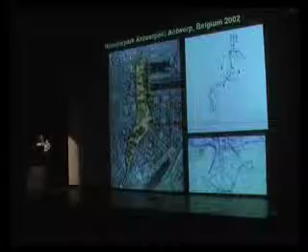Now, I'm diverting for a second because a long time ago, we did do a competition with Willem Neutelings. I think this was in 2002. It's for Antwerp, the abandoned Belgian railway yards.

I don't really remember all the names of the neighborhoods. I couldn't really actually pronounce them when I was working on it. So I can't really remember the specifics about it, but I do remember that we didn't win it, and it broke my heart, and I thought that the jury screwed up. They should have picked us, but I'm biased.

But we did try to do a number of things. It was an extremely interesting piece of land, and these are kind of typical things that come across our desk as landscape architects, which are these kind of random, strange pieces of land that are going to be reborn into another use. And it has a very, very strange shape. It's surrounded by a great variety of different neighborhoods.

This glitch is really not good. Wow. Okay, are you sure you can't understand English? Yes, okay. Try not to look at it.

The core of the landscape, of the design, was to try to bring meaning, or a new meaning, into this big site, so that it could be actually reused by the city. It's about 24 hectares, and it was interesting because there were so many disparate pieces to it.

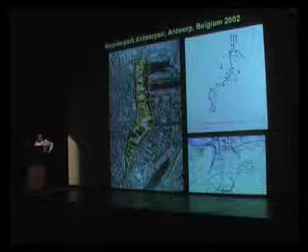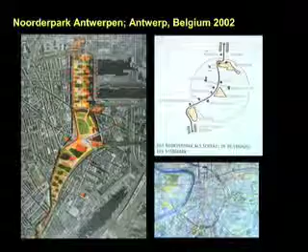We basically came to the conclusion that the west area, the top area, would be a much more cultivated, park-like space that could be integrated with the mixed use, the office, the residential area up against the dock area, the port. The middle area, the belly of it, was a great big public civic open space that the whole city was invited to. The east area was really a great big playground where we envisioned having all sorts of sports.

I don't know whether Will is in the audience. He probably should explain this better than I, but we had some very simple diagrams. One of the ideas in these parks is how do you survey it, how do you get through it, how do you make sure people are safe, because safety in the public realm is very, very important.

We had a major road where you could inline skate, have cars and service, on this big track. To your right is the noodle track—if you didn't want to get from point A to B quickly, you could noodle through the park. The lower left-hand was kind of these ideas of public outdoor rooms, but of very different nature.

To the left was kind of small garden-esque, well-maintained areas. The middle one was a great big public amphitheater, great big meeting room where you could have rock concerts. To the right were different kinds of sports and park areas where kids could come and play. And all the way to the right was an idea about how to light it for nighttime.

This one image shows the idea that Willem really pushed, which was having a very integrated interface between the park and the harbor, where trees and spaces actually interlocked with the harbor itself.

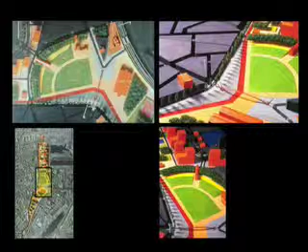We had a series of more cultivated gardens, fountains, play areas for the people in the office buildings and the newly built apartments. They also would be charged for maintaining those areas. The center area...

is a great big amphitheater where you could actually have a soccer pitch. People can sit and watch over. Could be big rock concerts, sports events. And then we had a bridge over to the Dam area, so that connectivity between the neighborhoods was actually continued.

We had a very fun idea where the old station building is, where as the new speed train goes up, we were creating a whole wooden platform that underneath it would create another kind of art space.

Finally, in this area I liked a lot, was an idea of how you could create spaces where girls coming from an Islam background, who needed some sense of privacy and separation, could go and play in areas next to boys who want to play basketball.

This idea really came from an evolution of the idea of the democratic space, because in the United States we've had democratic parks for quite some time, which are great big open expanses of open space. For many years we've realized those spaces don't work very well, because even though it's so-called democratic, it ends up being ruled by the guys with the big bats.

And finally, the entrance into this was where this great water tower was, and there were going to be events, restaurants, but a great big kind of celebration getting up into the tail end of the park. Anyway, I was very sad when we lost that, and I am very, very interested to find out actually what happened to it.

A number of years after that, maybe three years later, we were asked to do a competition for Exchange Square in Manchester. The square got bombed by the IRA in 1996, and they took it as an opportunity to rebuild this part of the city.

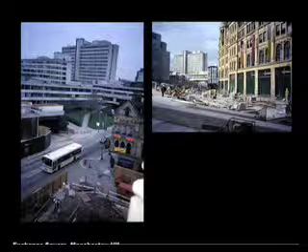This image to your left is what our landscape looks like—it's all the in-between stuff, in between bad buildings and kind of good buildings. This is really typical of what our landscapes look like, and our task was to figure out how to make a place out of this hodgepodge of pretty ugly stuff.

These were our competition entries, and the idea was to knit together the old part of the city, based on an outcropping of pudding stone, with the upper level shopping district, which is sleek steel and granite. Along the seam where these things are healing is where a lot of the action is.

In order to deal with the grade change—the shopping area was one story up from the lower cathedral district—we created a series of ramps that very slowly brought you down from one height to another, differentiated by long linear benches.

The object of making public spaces work is to create enough of an image where people know something's going on, but leave it mysterious enough that people can bring their own interpretation. We do a lot of research every time we go to a site to find out what is very special about it.

This is an ode to the train industry, without which Manchester would never have become a nexus in the Industrial Revolution. So we made these benches out of leftover train parts.

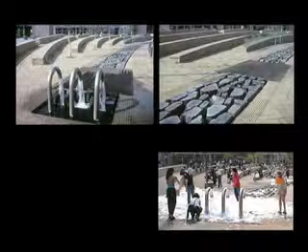The stream that we put in was because the arc the whole city is based upon was once a stream bed, and the road was called the Hanging Ditch Road. So we resurrected the ditch, at least symbolically, creating a feature to embed it into that place. The Hanging Ditch is a great success.

You find more people walking and playing on this thing than actually walking by its side. Enticing people to play is very important—we all love to play, and adults like to play even more than kids. It's become a very well-loved space.

As a matter of fact, it became one of the generators, the engines, for the regeneration of downtown Manchester. This project became a poster child for regeneration: if you really transform your public open spaces, other things will follow. And in fact, that is exactly what happened.

This is also true for cities that aren't regenerating but are generating for the first time—like Mesa, Arizona, southeast of Phoenix, out in the middle of nowhere. It's a very fast-growing city, but hard to characterize. That's downtown Mesa: streets are 100 feet wide so a team of oxen can make a U-turn, and the buildings are all one story high. There's almost no one there yet, except the population is growing.

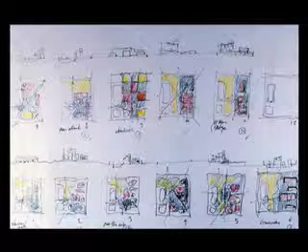So they decided to develop this area as a cultural arts area. The landscape in this area is fantastic, but the only problem with building in the desert is that it's so fragile that once you disrupt it, it doesn't grow back very much. That means if you build an ugly building, it's there for a very, very long time. And that's exactly what's been going on. So the built environment is horrible, but the natural environment is beautiful.

Now, I just stuck this in because we work with an architect named BOORA, and the senior designer there is Bud Oringdulph. We often work hand in hand with architects from the very beginning, coming up with lots of different ideas at first and trying to figure out what really works. I'm not going to go through these, but these are three or four very different site plans for three major theaters.

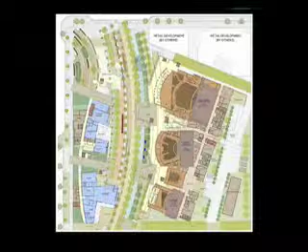An art gallery, and a school. And the one we actually came up with was basically an arc. The public open space for this facility exists in the middle of it, as opposed to along the street, because we needed to create a street edge, which was very important to have there. The inside of this, the great swath of open space, actually creates the front doors for three theaters - a Papa Bear, Mama Bear, and a Wee Baby Bear theater, three different sizes. And on top of it, there is an art gallery and a school.

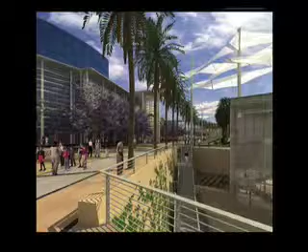This has just recently been built. I'm going to go through it very quickly. The major idea was, first of all, to use the sharp shadows created by the sunlight there, which is really intense, and use the plants in a very theatrical way. This is all about theater. So it was like putting these plants, these trees, on display, and then letting the sun and the shadows they cast be the major players.

Now you're looking at the art gallery, which is actually below ground, and this is an outdoor sunken courtyard where there are gallery shows, and this is a waterfall. We've been able to use this water wall - very little water, but it really cools that space. It's kind of like an outdoor air conditioner. And this is an integration of spaces and landscape together.

Here's the art gallery that is actually underground. And this wall actually separates the inner space, the great big arc, what we call the shadow walk, from the street corner. And here we are on the inside.

The idea was to use grass very sparingly. In other words, we were very anxious not to use a lot of water. But wherever we wanted to create places for people to sit, we used grass so they were either kind of carpets to sit on or like a great big fat cookie sofa. We actually made a great big lounge for people to sit on, so people can hang out on the grass and the seats and in the shade.

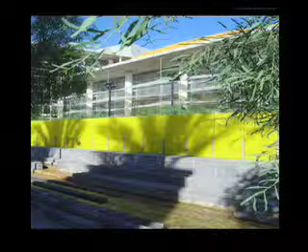So these little rooms are breakout rooms where you can break out from the theater and have wine, hang out, have little parties in them. So the more opportunities you have to kind of create intimate spaces inside a bigger space, the more people actually use the space.

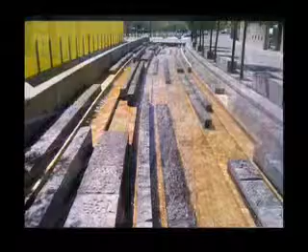Now we have a big fountain that's about 600 feet, like 200 meters long, based on the arroyo, which is the water system in the southwest, where it rains and rains in the mountains, and then there are flash floods that come down through the valleys, carve out these ditches, and then the water goes away. So this fountain starts, if you take a look at the arc, way at the top, and the water fills up a great big concrete basin. When the basin fills up, it gushes out into this channel, the channel fills up, and it rushes down, then drains out, and it's dry again. It does this a few times a day.

Then we created different kinds of canopies that would be playful with the sun and shadow. And of course, when it does rain there, all the stonework, which is from natural stone around the area, becomes really vibrant.

Now we're looking at this outside arc, which is basically a glorified bus station and the sign for this whole development. This is actually the roof of the art gallery, and everything had to be in planters so as not to affect the gallery below. So we used these planters basically as plinths, as though the planting themselves were the art gallery, reversing the idea and putting all the plants on display. These glass boxes are actually light wells into the gallery below.

People can wait for the bus and hang out there too. But this is a 0-0 corner of the city.

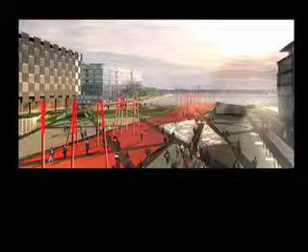This is a new project we did in Dublin for the Dublin Docklands. It's about 2 hectares, right in the middle of a newly developing area in the Docklands. The space actually got built before this performing arts building designed by Daniel Libeskind. But when we saw what Daniel was doing, we thought we'd better go with it rather than against it. So our idea was to take this very strong and aggressive aesthetic of the building and lay it down on the ground so the whole thing became one united expression.

We decided to roll out the red carpet to the world and lead people to the front door of Dublin, which is going to be this marvelous music hall, and it's on top of a parking garage. Most of our work in the cities is on top of structures, garages, subways. All of our work is really heavily technical because it's attendant to buildings.

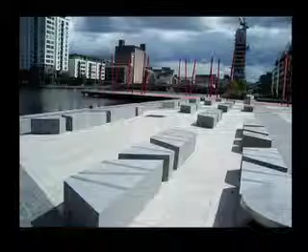These poles actually light up at night, which you'll see. Basically, it's a very simple idea: we have a great big red line, a great big green line, and we really created a whole new look for Dublin, which it has done.

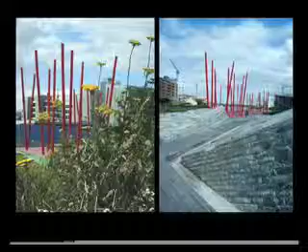So the Performing Arts building is being built now. The green swath is where you can go and sit, with lots of benches and seats inside the planters, which hold plants indigenous to the waterfront, which isn't really there anymore. There's no real habitat for those kinds of plants, so we made them able to grow there. Then there are water fountains, which again took this idea of cracking earth.

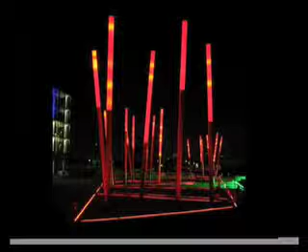And the last part of this will actually be built and constructed when the theater is finalized, which we're working on right now. The light pulses up and down the pole, so there's always kind of movement at nighttime.

This next project is in Qatar. We're working with Skidmore, Owings & Merrill on the headquarters for Qatar Petroleum, and this is a super complicated project, so I'm not going to go into it. Of course, water is a real issue, and a lot of what we designed was really based on trying to use as little water as possible.

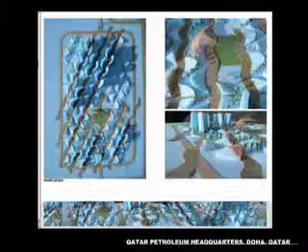But the buildings that you see are these leaf-like structures, all made out of concrete. Very, very sculptural, very beautiful. The landscape was created as a carpet that extended from the expression of the building. That kind of shows you what the buildings are like. But the landscape itself is basically sculpting the desert, using the creation of dunes as part of the aesthetic there.

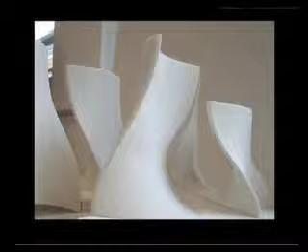This is what the buildings are going to look like, and the landscape travels at the bottom of these things. As the landscape gets inside this corporate headquarters, it gets greener and more lush. As it heads out to the site, it becomes drier and drier, to the point where once we really get out of the site, it's made out of different kinds of stones and asphalt, and we're not planting up there.

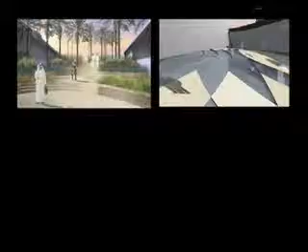We're still working on drawings for this, but it's going forward. It's a very big, complicated project. These are in-between parking garages, because there's a whole level of parking underneath everything.

One idea was to create a landscape made out of shadows, but they didn't go for that, so we're not doing it. Instead we're really working with how the wind works and how the silt and sand get deposited, and with structures in the desert itself that would catch the wind. The idea is to create walls that collect the sand, but also light them as well.

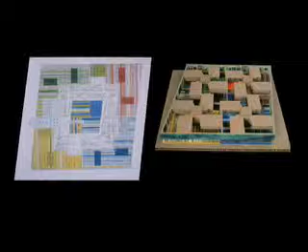This is a project we did a number of years ago in Munich for the Swiss Re headquarters building, with Bothe Richter Teherani architects—Hadi Teherani was the architect on it. It's an absolutely crazy, wild building.

We were asked to do the landscape on it, because it turned out that once they figured out what they were building, nothing would grow—the areas meant for planting were all dark. It's still difficult for architects to understand that to have things actually grow, you need water, and water weighs a lot, plus you need sun and soil. This building really didn't have the room or weight capacity for that, so they brought me in, knowing I'd entertain trying to do a landscape without the benefit of using plants.

This shows a plan view looking down at the building, which is organized in four cores, with shoeboxes that are the actual offices. The shoeboxes sit on a square building below that houses the various public activities of the corporation, but all the landscape is on top of surfaces.

Our big idea was to create quadrants and color each one differently so you could orient yourself through the building. It looks very logical, but once you're inside, it's impossible to figure out where you are. So we took the idea of the agricultural fields surrounding the site and applied them to a series of roof gardens.

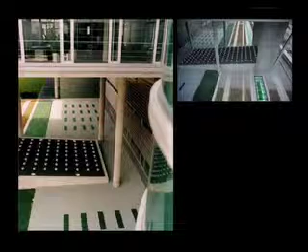One of the wilder ideas was that because Swiss Re didn't know who their neighbors might be—this is in Unterföhring—they decided to build a hedge so they wouldn't have to see them. The hedge is blind, three stories high, and you can walk inside of it, but essentially it creates a wall around the headquarters building.

So it's a very spatially rich, really interesting building. I'd suggest if you go to Munich, go out there and see it. But where we couldn't plant plants, we didn't.

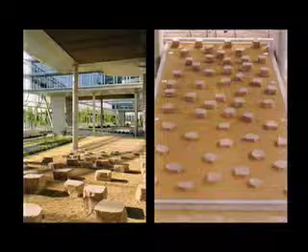We used other materials instead. This shows the yellow quadrant, and some of the variety of green roofs we did. Some areas were very, very dark, and instead of using water, which is ecologically difficult and expensive, we decided to use mirrored balls. Here's the red quadrant—so it's a patchwork of all these different materials, plus where we could plant, where there was sun, we did plant.

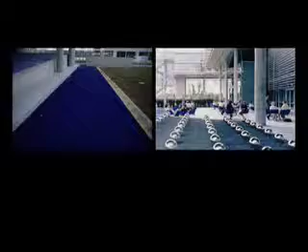The interior was where all these materials came together, existing under a very thin film of water. So when you walked in, it was completely reflective, but looking down from the office buildings, you could see everything.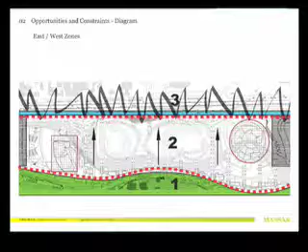The First Lady's agenda is very child-oriented, aiming to teach children about how to engage their environment and learn about the world. So she's really backing this project.

This shows a diagram of a very noisy street, with a hillside in the back upon which the university exists. To your right is the Children's Center. There are basically three major areas: the Children's Center to your right, a middle space that's a great big open activity play area, and to the left a more adult-oriented area next to the Opera House.

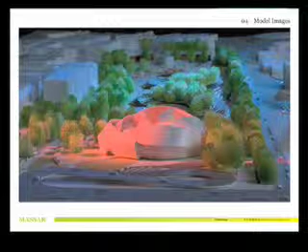Henning Larsen has designed the center to actually look like the Damascus rose, which is a very powerful symbol in their culture.

When we were trying to figure out our design language, we looked at contemporary art based on Arabic calligraphy. Without getting into the specifics of what it was saying, we studied the various motions and forms the calligraphy was taking, and derived a lot of forms from it, since that culture doesn't like straight lines—they don't relate to it. So we wanted to do something very flowing.

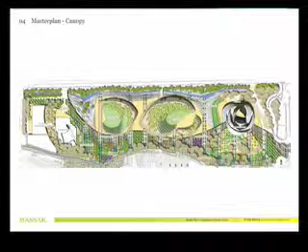So what you're seeing is a huge parking lot in the middle, and on top of it are two big grassy amphitheaters, using grass inside of bowls. So you have the building, two bowls, and then this Barada—a water area that's a channeled river that turns into a beach.

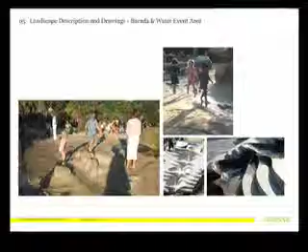Here's that beach area, and the idea is to make it into a play space as a way of engaging kids with water and actually growing things in that area too.

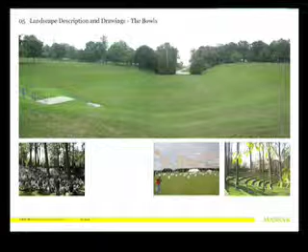The middle areas will be these beautiful bowls on top of the garage. The idea is to create a surrounding that's totally green, which would thrill the people there because they love green grass. These will be used as picnic areas primarily, but also for outdoor entertainment and play. The idea of being inside a green room I think will be very compelling.

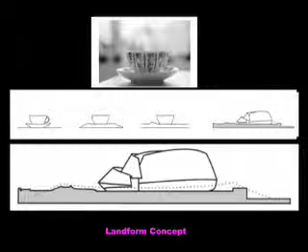Right next to this is the center. This shows a section through the bowl—it's too small, but the idea of the landscape around the center is like a teacup in a saucer. We're busy working on the first phase, so you can see how much more developed the landscape gets.

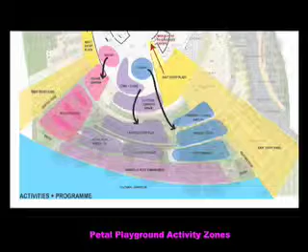This shows how the various areas around the building have to relate to the building itself. We have to think very carefully about how people use open space, because there's a whole variety and gradation of different uses out there, and some are okay to be next to one another and some aren't.

The lower area is really the playground, and that's where we've spent a lot of attention—creating a series of different levels and different spaces for different activities for the kids, while still being protected and seen as part of the building itself.

There are a series of very gentle walls that create the levels, and we're suggesting doing mosaics on the walls. They're also climbing walls, so the kids can climb on them—the walls become something to play on.

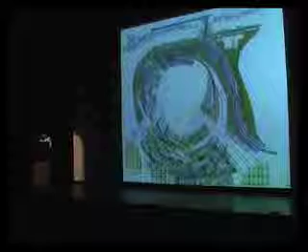We have protected areas for smaller children, areas for outdoor performance, and this is a play area with slides, a performance area, and areas next to the building for outdoor learning and a cafeteria.

So this just shows how we do a lot of work with models, sketching things out in three-dimensional form to figure out what we're trying to do.

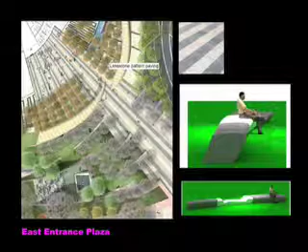And then we have this great kind of processional that leads into the building itself, and we're designing the benches, which will all be done out of stone.

And then I just put this in. This kind of shows the exercise we go through trying to figure out what the paving should be, because paving is a wonderful opportunity for all sorts of things: design, expression, color, rhythm, texture.

And then of course planting. The idea that we hate plants is ridiculous. It just must read well in the press.

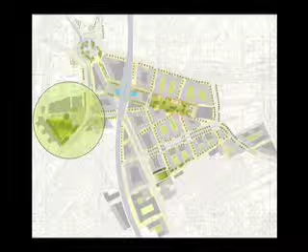So we've just completed the design of this, and it was very interesting because the churchyard is full of graves that we couldn't move. So we had to tread very lightly and deal with the fact that it's kind of lumpy ground, with a lot of stuff happening underneath it.

But we also needed to open it up to the street and create a structured play area for the neighborhood, and just kind of clean it up and make it much more open and accessible. It's been tremendously successful — we won an award for it immediately.

So this is like a graveyard that has kind of come to life again, at least on the surface.

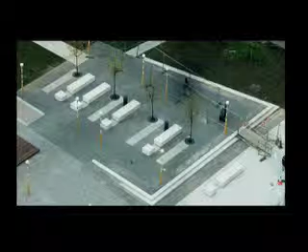And then the front, as it faces Elephant and Castle, is much more hard-edged. You can hang out there, you can wait for the bus, you can watch your kids, you can see what's happening in the Elephant and Castle area, but it's a much more open and gracious way of actually meeting the street and giving that space an address back to the rest of Elephant and Castle, connecting it back into the city.

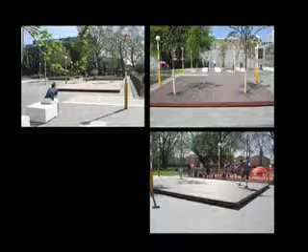So evidently it's gotten so overused at this point — kids have come to it from all over. There was such a pent-up need for a playground in this area. It's a small little project, but it was very rewarding to actually see this built.

This is an interesting one. I'm going to go through this quickly, but I just put it in to show you the kind of breadth we're often asked to think about, where Chatham, this little city southeast of London, is trying to regenerate itself. It's going to be connected to London through a fast train, which will enable people to live in Chatham and work in London. And yet it's a very bedraggled, down-at-the-heels little place.

It was historically the area where the British Navy docked, and has a great big military and naval yard. But the development has been very sporadic, not very well organized. Unfortunately, it has an inside-out town, so the main road, the main street, forces the backs of all the buildings to actually address the water, which is actually the great place to be.

A lot of these cities were built in a way that made the water the bad, ugly place — like a sewage system you never wanted to face. And now these cities are trying to figure out how to turn themselves around.

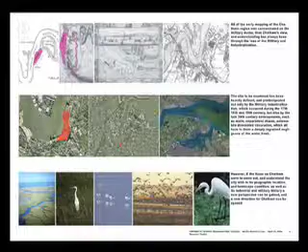In addition to that, they have an incredible ecological system that runs along the Thames estuary. So we worked with British Waterways and hydrological engineers to really try to figure out how to not only regenerate the city, but regenerate this ecological open space system, connect the open spaces, and actually raise it to the status of a park.

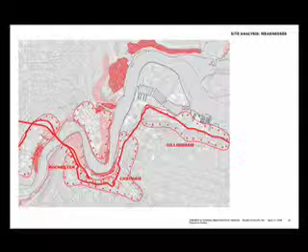At the same time, we suggested some really wild things. These show our thinking process in terms of opportunities and constraints: where is the development, how is it linked, is it linked at all?

And then here we started looking at the ecological areas, which are the green areas. But what we proposed was to dam the little hook in the river, so the water could actually stay at a level, because the Thames is tidal. When the tide goes out you have all this muck and needles and garbage — it's really a tough edge to commandeer, to actually take hold of and develop.

They're also really looking at the fact that with global warming, there's going to be much more pressure from water coming in, so they're starting to think about how to protect themselves. Our proposal was to dam up that bow of the river so the city of Chatham could start to develop and redevelop the island and develop along its edge.

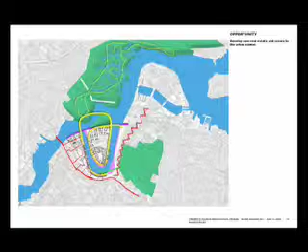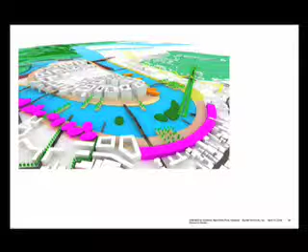The yellow are roads that would actually access the ecological area and the edge around the river, and then we're proposing a redevelopment of that island, which is now just industrial, but it could be very valuable land for the city. We'd reconnect the roads, create bridges over to the island, connect out to this wetlands eco area, join them together, and encourage development. These are big moves that could help generate a strategy for protecting themselves from flooding, and also begin to generate a new edge for both the island and Chatham for regeneration.

We haven't heard from them yet, but we really tested its viability.

This next one is this kind of wacky one out in Abu Dhabi, and it's also on an island. It's the developer Mubadala, and it's the new financial center for Abu Dhabi. The architect is Jim Goettsch from DeStefano Goettsch in Chicago, and the aesthetic of this, as you can see, is kind of almost neo-transformer.

We've been working on a master plan for this island. This is actually the signature and first project that's going to be built there. You can see everything's pointing to this new island that is actually being created. The island itself is about 120 hectares, and the site is about 3 hectares.

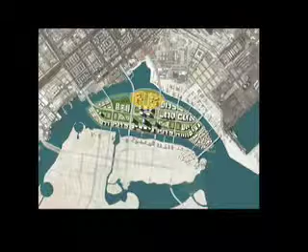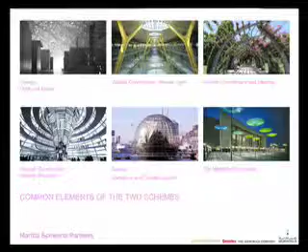But it's all built on structure. It's a multi-use, mixed-use project. There's the island, and the uses, and there it is situated. The financial center sits on top of a huge shopping area, so there has to be connectivity from the plaza level, which is about 20 feet up from the ocean. So very, very complicated level issues.

I just put these in here so you can take a look at some of our design processes. This was the first idea, where we wanted to create a series of trellises and canopies that you could walk under and link to the buildings, to create a canopy that would protect you from the buildings looming over you, so you'd never feel like you had any privacy. Plus the canopies would be wonderful for providing shade, and also a way of dipping down into the base of the building itself.

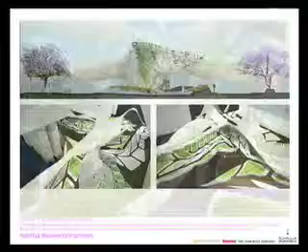These are some early images of this landscape. Again, it's on top of a roof, under which is a whole shopping area. The idea is that some of these canopies actually dive down into the shopping areas, which are three stories below it.

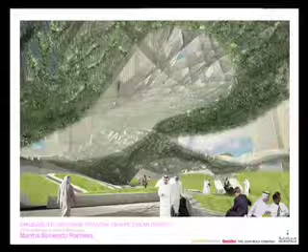We were really going like crazy, and then the architect freaked out. So we're not doing those anymore.

So we went back to the drawing board, and we came up with this kind of wild Victorian pattern, like a floral design your grandmother may have used on her sofa, but very bilaterally symmetric, and also much more feminine. These leaves are actually made out of great big mounds with different colored facets, and then the paving around it would be made of bands of stone. It would look very much like this.

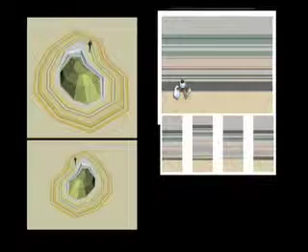The idea is that when you look down on it, it really holds together as this great big pattern. But when you're down in it, it would be very sculptural, with these great big earth mounds with colorful ground covers all around you. Some of these things turn into water, some turn into water and light. We're working with RFR on canopies, but we're not doing these either because I couldn't stand them, though we're still trying to meet halfway. It's always a challenge.

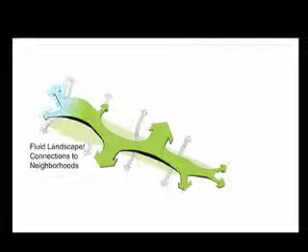This one is a very large park that we were doing for Meraas in Dubai, and that stopped. But it's a centerpiece for a huge development where the park has to function as a place where people can park, as the first big open space in the city of Dubai. This thing is really very, very large.

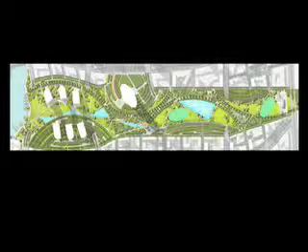How big is it? It's about 40 hectares of open space. And all of this is actually functioning very ecologically with the buildings planned around it, so that waste from the buildings will be managed so we can water the trees, water the grass, and create ponds as well.

I won't go into a lot of this, but this is really a heroic effort, and the first time I think that this culture is really taking public open space seriously, because they realized there's got to be some reason to go to Dubai besides meeting people in hotel lobbies or shopping malls. So the entry area would all be a wetlands garden treating gray water.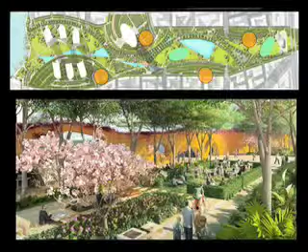Then we have these great big green arcs, which are actually neighborhood parks catering to the neighborhoods on either side. And there's a swath of open space that goes all the way through, with roads connecting underneath it, plus parking garages and shops underneath as well.

We have areas that are canopied and will generate electricity using solar panels. We have these very thick walls, which act as places to house equipment, create secondary walkways, and actual gateways leading from the neighborhoods into the park proper.

We have water play throughout it, and then at the very end, a great big public gathering area.

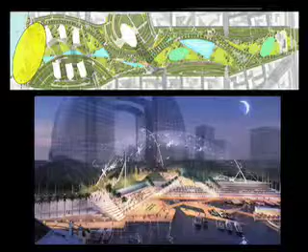This next project, I'll go through quickly, is in Seoul. We're doing a huge mixed-use development with Richard Rogers—Rogers Stirk Harbour now—a mixed-use development.

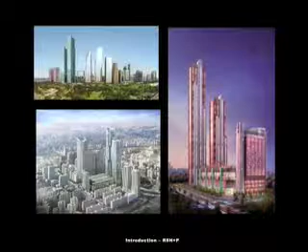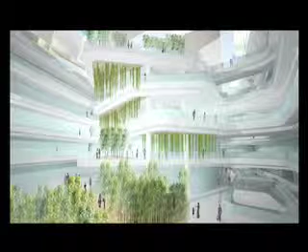The idea is we're making a deck, a rolling landscape out of a wooden deck through which all the bamboo comes through. So when you come in, you look up, and at the very top is this bamboo forest, with overhanging plinths.

These plinths have green beards that lead you up to the top. This is an image of the wooden deck, which is actually a rolling landscape, with a stream running through it. The bamboo comes up through the wooden deck.

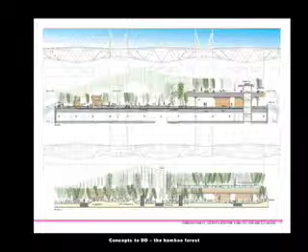There's a lot of heavy-duty shopping going on, so they're very conscious of trying to create a differential. It turns out the big spenders, the men, come and let their women go shopping, but then they want to get out and go somewhere else. So this area is probably going to be more for men than women.

This shows one last level, which we call the pebble. This is how the wood would wrap around that surface, showing the landscape of this wooden floor, with a railing that keeps it from falling off.

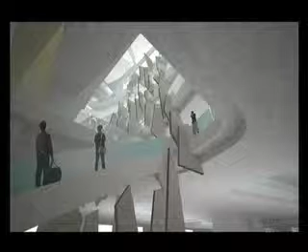In the back—I don't have good drawings to show this—there's a stream made out of shards of stone, which come tumbling down the back end like a stone waterfall, then flow into the Sunken Garden, which I'll show you.

The Sunken Garden is at the base of the two 100-story towers, basically 3 stories below street level—really down in the ground.

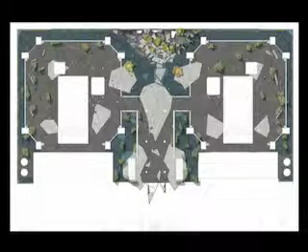In the middle, you see on the top there, is a place where all the guys go to smoke and hang out around the edge of a space and watch other people. Evidently, when you go there, that's what the guys do. They come out of the office, light up their cigarette, and hang out along the edges. So we made a great big area where all the edge hanger-outers could hang out.

So this is this rock pile that we're actually constructing. It kind of looks like Superman's cave. But the idea is that the guys can go in there, sit on these steps, and puff away and kind of watch everybody else.

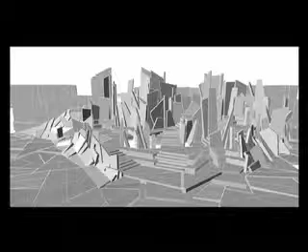These sheets of stone are coming down and creating a ground plane that will have water running over it, very thin. You can see that's a section. The street level is up here, then you have the sunken rock quarry plaza, and then you go back into the building. The sides of this quarry are also made out of these pieces of stone, which will have water and light. It looks like the earth is just kind of cracking apart.

And this is the final project, which was an art installation that I did this past summer in Reykjavik. I entitled it 'I Hate Nature' because it's very interesting - the natural landscape of Iceland is so overpowering and so sublime, people just get sick of it. It's like too much, so beautiful and so powerful. So I decided I wanted to do something about the sublimity of the landscape in Iceland.

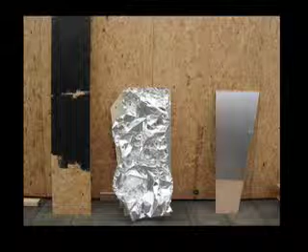So I kind of took this geode as a model. The installation was at the Museum of Art in Reykjavik. These were the materials, which is just kind of wood with a very sticky, gooey black paint and aluminum.

Aluminum was a big topic there because what's happening for their economy is that they're allowing aluminum to be smelted in Iceland since they have geothermal heat and can smelt it very cheaply. But these buildings are huge, and it's actually degrading their landscape and causing social problems. So the topic of aluminum is very timely.

This is Jake Walker and Dan Gass who helped build this. At the beginning of installing this, they had enough energy to fool around, but that was just at the beginning. We worked for 5 days trying to build this thing. It was insane. The only good thing I can say is that the sun didn't go down, which was helpful. We needed all the time we had.

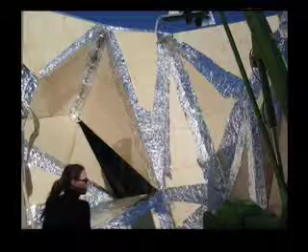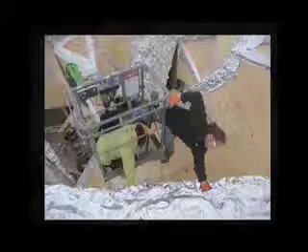This is a model of the installation. Right now you're looking to the inside of the geode, and we're trying to figure out how to cover the whole interior with crinkled industrial-grade aluminum. The idea is that people would walk inside the geode and only have very controlled views into this space that was so blindingly bright and so intense it was painful. I guess the other good thing is that it wasn't sunny.

And here we are just finishing up inside the space. I realized I didn't like the way the seams were coming together, and one day we ran out and went to all the stores in Reykjavik and bought out their entire supply of kitchen-grade aluminum foil. Then we got stopped by the police. This is BAM, a group of young architects who helped me do this. Then the landscape architects came out and helped as well, thank God they did.

So, this is the installation. It actually sits, it's a big box that sits in a U-shaped courtyard, kind of uncomfortably in it - squeezed in. Looking from above, you can see this open space. It kind of sits there like a meteor, just kind of black and brooding and tough.

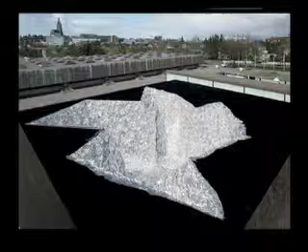When you get inside of it, there are very few places where you can actually see the sky. We designed it so you really couldn't see how big it was or where you were looking. It seemed to go on forever. Because it was so dark inside, when you got in there and your eyes were dilated and you looked into the inside, it was pretty painful to see - very, very bright and intense. But very controlled views out into this, like a cauldron of light.